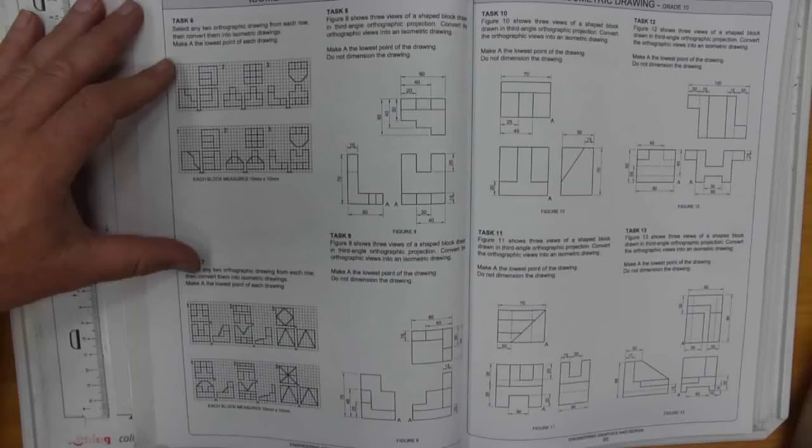Hello grade 10s. Today I'm looking at task 8 of the isometric exercises. I see in my textbook it says it's on page 54. It says figure 8 shows 3 views of a shaped block drawn in third angle orthographic projection. That's important to remember. Convert the orthographic views into an isometric drawing.

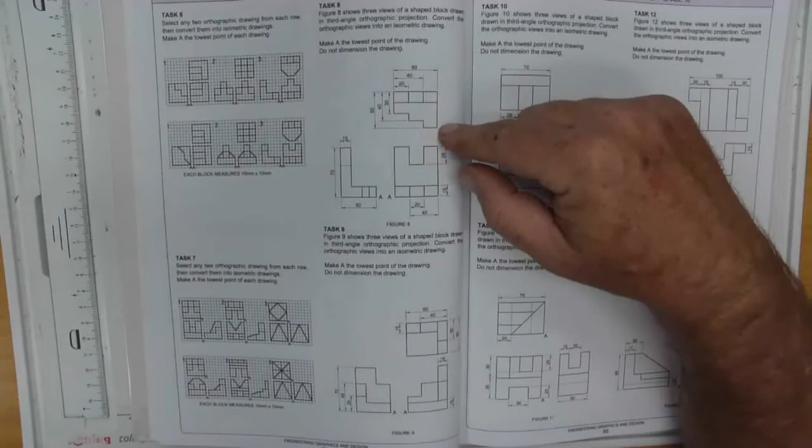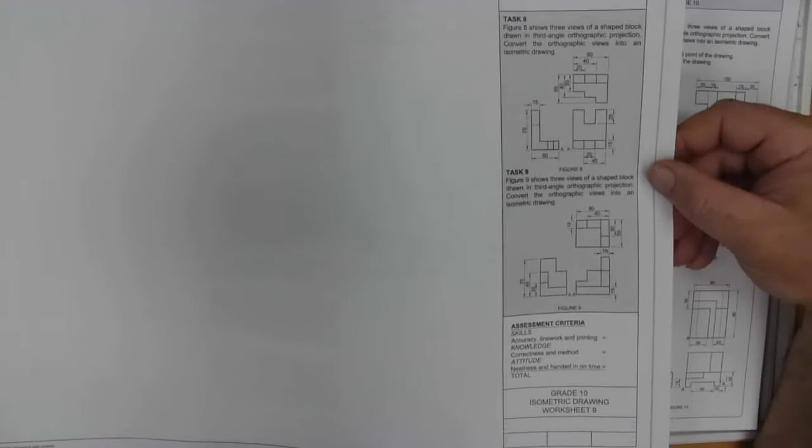So we've got to take that drawing and convert it into our isometric drawing, and I've got the same drawing on page 65 of my workbook drawings. So if we can get that out, task 8 of our workbook. Also grab a spare blank piece of paper just to do some sketching.

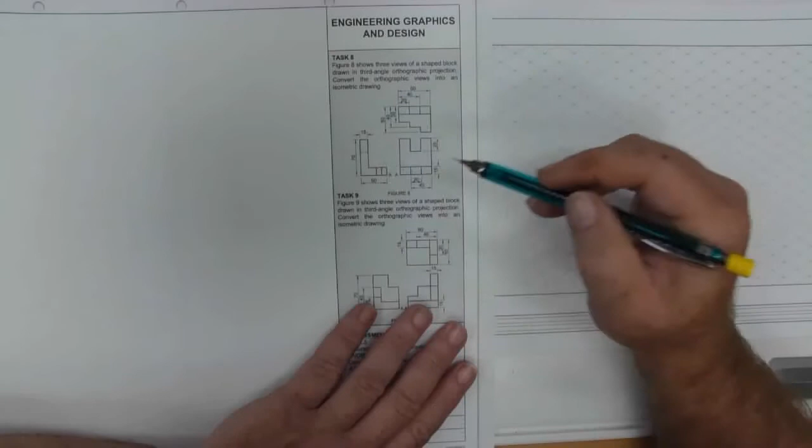As we're getting started, we need to remember the positioning of the views. The most important view is the front view. Now the front view would be this view because it is common to the top view and to the left view. Remember, third angle is the truth, so our positioning would be as follows. The front view, top view goes on top, the left view goes on the left, the right view would go on the right if they'd given you the right view.

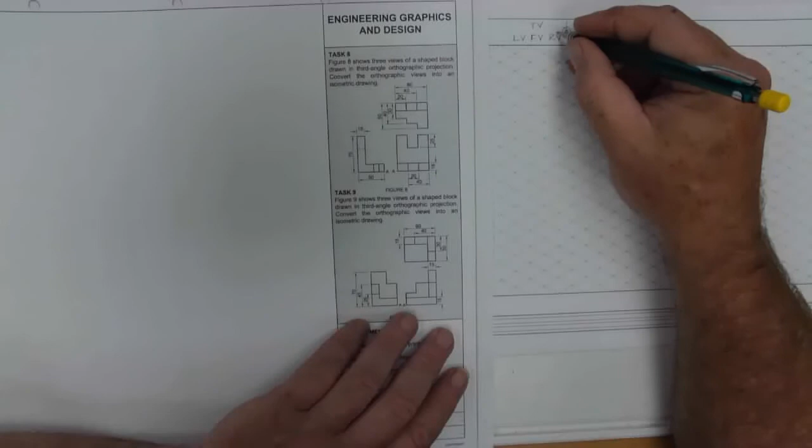Remember as well the symbol for third angle. The symbol is the tapered roller. So a roller that is tapered slopes. That is always the front view. Now the circles are always the left view, and in third angle the circles are on the left. So that was the symbol for third angle.

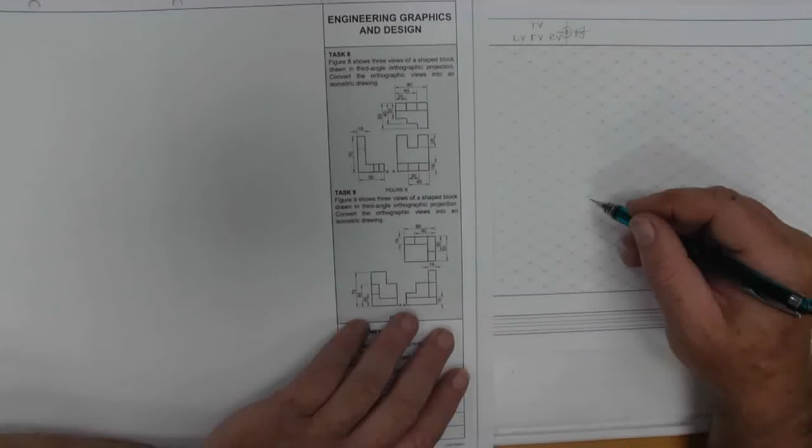So this is what they've got. In order to try and get us to position this drawing correctly, they've said make point A here the lowest point. Now I've got an isometric grid here, and what I want to look at is maybe just doing a sketch before I get started to help me when I'm going to do my drawing. The first thing that I'd want to do is have an isometric axis. So my vertical line, my 30-degree line sloping to the right, my 30-degree line sloping to the left.

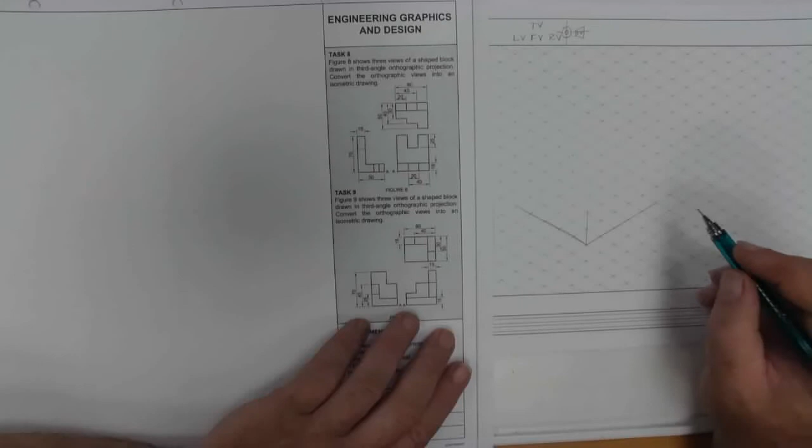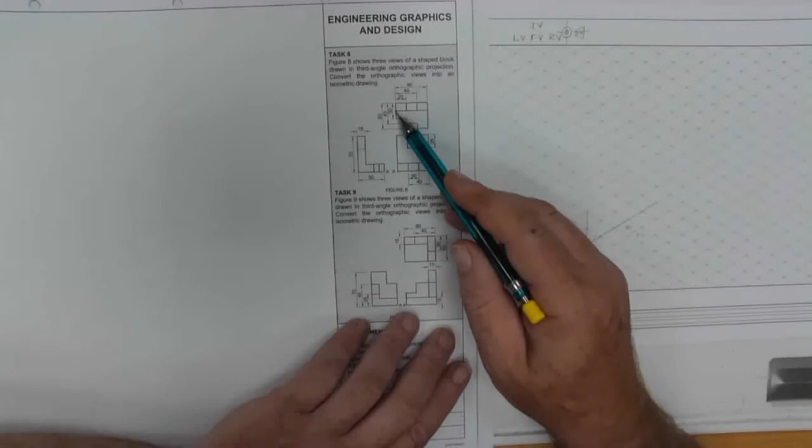This is the front view, that is the left view, so the left view they want to see on that side, and the front view they want us to see from this side. So in this shape we've got a bit of a step going back. So it's 30, 40 and 50 here. And our length dimension is 60. So that's roughly going, there's 20, 30, 40, 60. So that would be my front view shape.

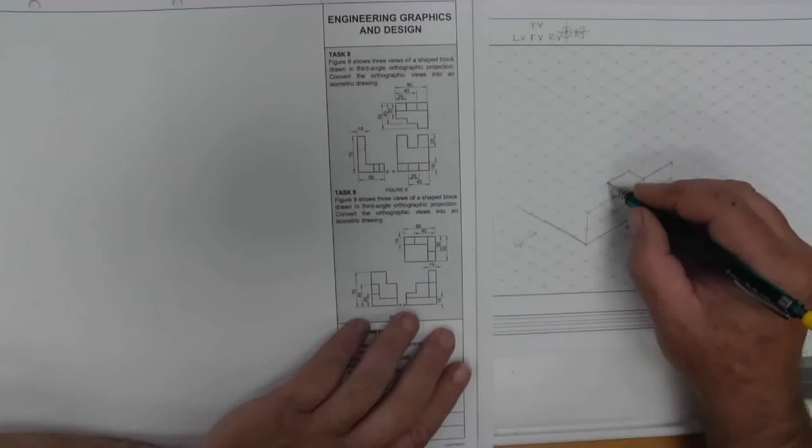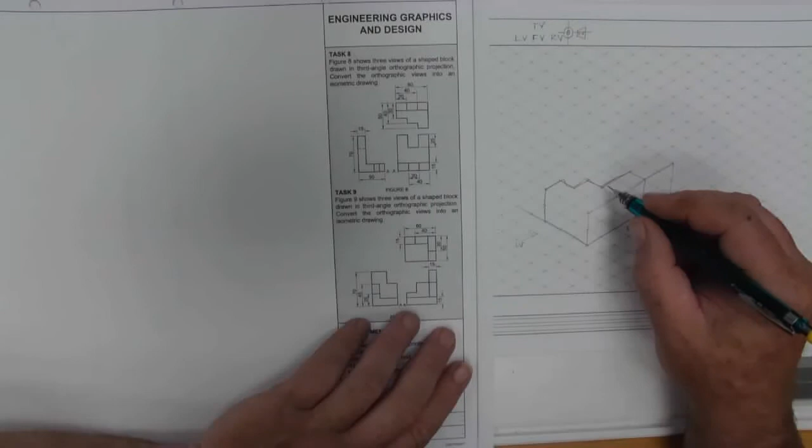Now after 20 there was this side. Then we've got the steps going back. So there are the steps. I think that's a little bit long. Sorry, that's got to come across here. So there's my step shape. This goes back then to this wall.

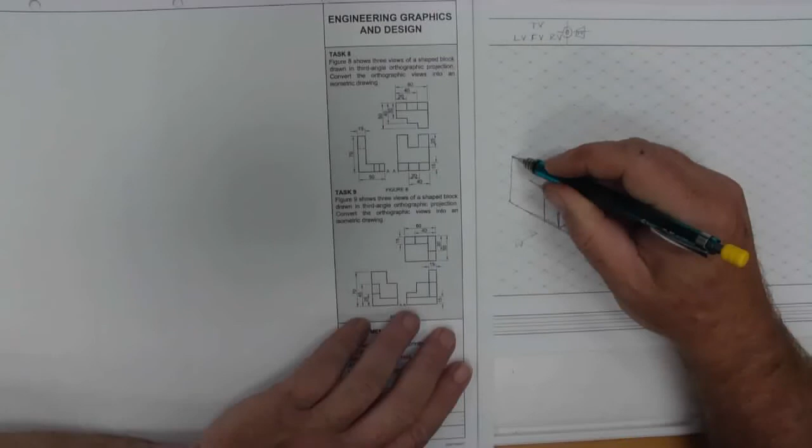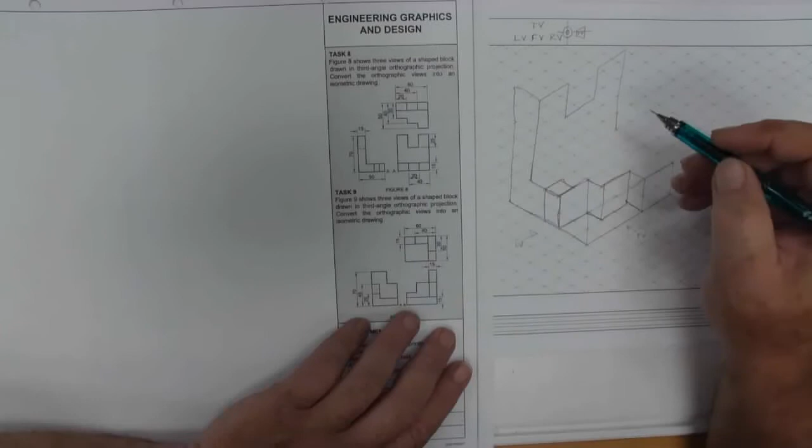The wall then goes up a height of 70. It went across 20. Down 20, across 20, up 20. I ran out a bit of space there. So there's a rough guideline of what I'm going to need to be doing.

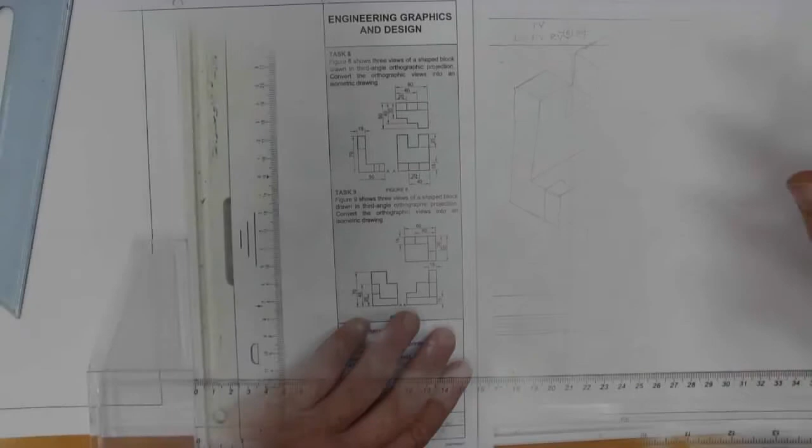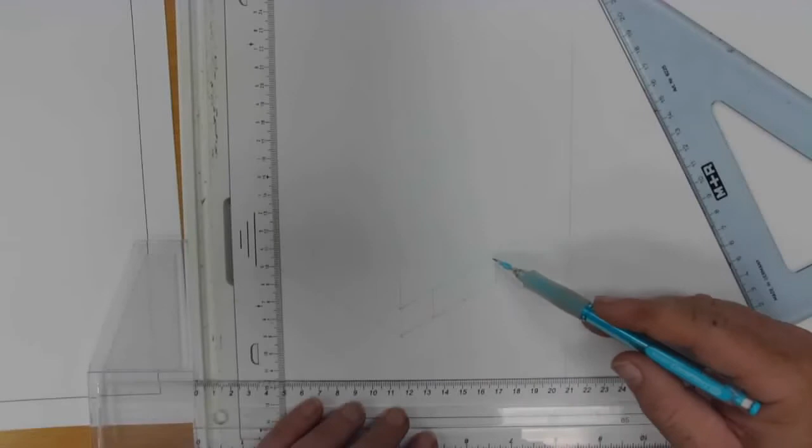I'm now going to mark off the length dimensions that I needed at the bottom here, which was the 3 measurements of 20, and the height at the bottom here was 15. There I've got my lengths of 20 and my height of 15. I'm now going to project that towards my left view so I can mark off the distances there. I'm marking off my width dimension here of 50.

Then we've got distances from the back. They've measured a distance of 30, 40, and then obviously the last one. Now I'm going to take those measurements across. So in this shape that I've got here, there are the steps that I can see, and very lightly those would also be going down, to get the bottom edge of those steps. On this side I've got my back wall going up, and the thickness of 15.

Now I need to mark off my height of 70. On this side it was a height of 70 minus 15, so 55. And then we've also got that height of 25 for the little part that's cut out. Let's project that now. I need to mark off my distances of 20 and project those.

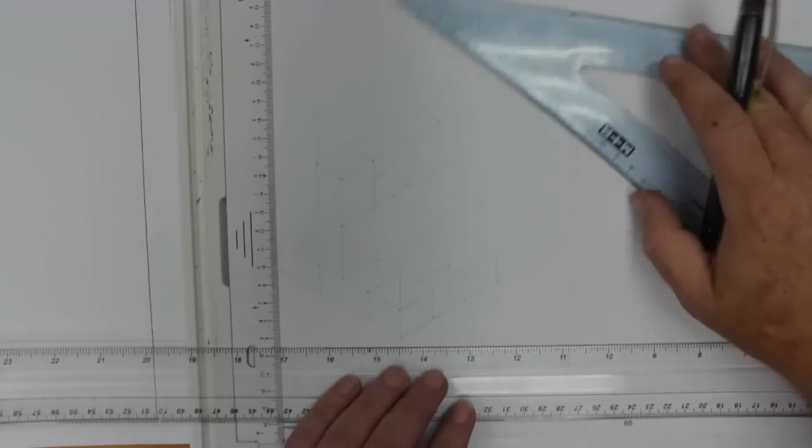And in that shape we've got our outline, and I'm now going to go over it in dark lines. Now remember, for me the best option is to try and work all of your vertical lines at one stage, 30 degrees sloping to the right in one go, and then the 30 degrees going in the other direction in one go, so you don't sit and rotate your set square the whole time. So again, if we start on the left hand side here with my vertical lines, and then darken these lines up.

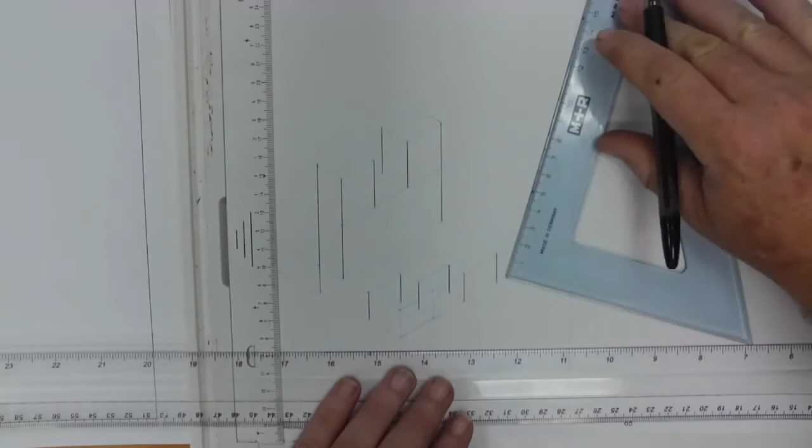The feedback that your drawing is going to give you is if these don't match up when you've projected them, then you need to check. Maybe your T-square wasn't straight when you did your drawing and it's caused your lines to be skewed. Obviously your vertical lines are a little bit easier to see if you've done them correctly. You're a little bit more used to seeing vertical lines and can assess whether they have gone skew. With time you'll also look at your 30-degree lines and pick up whether they have gone skew or not.

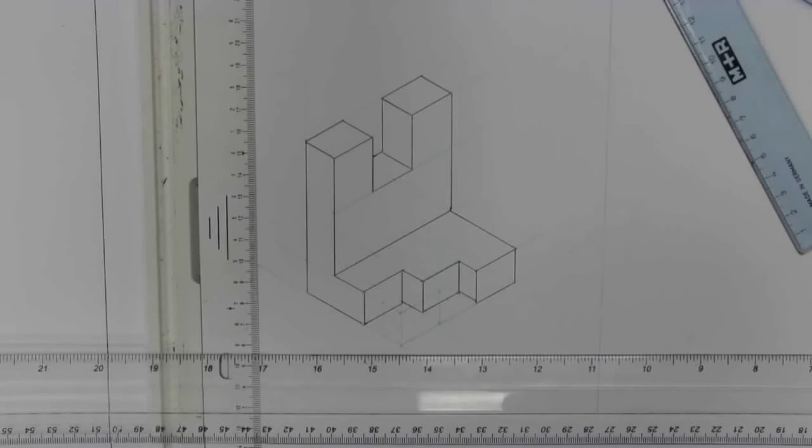There I have projected all my 30-degree lines going left, and I'm going to finish this off with my 30-degree lines going up to the left. There you have your completed drawing of task 8. In my workbook it's on page 65, in the textbook on page 54.